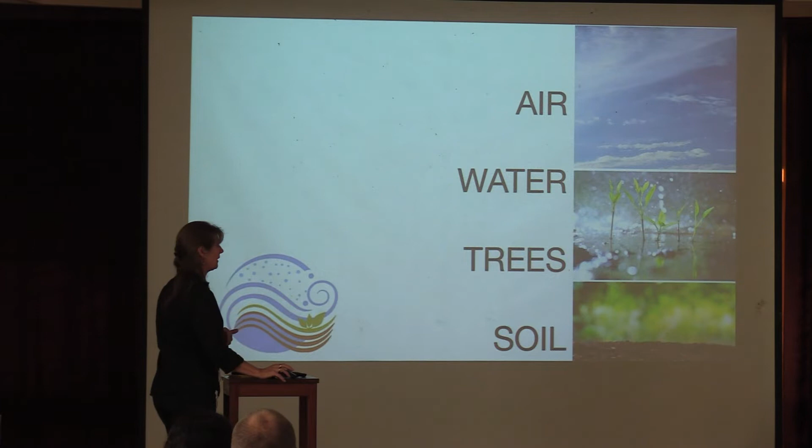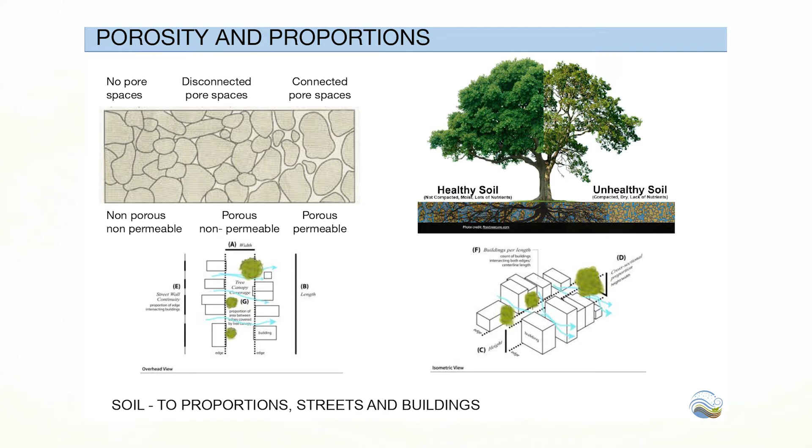The main point where we started was what is important: air, water, trees, the soil. I started out initially with Pavneet, but she dropped out because she got sick and ran out of time. So we started with the terms porosity and proportions, because it was just after the monsoon, and the porosity of the soil, which lets water percolate, felt very important to us. It's very obvious in certain parts of Auroville how it's different.

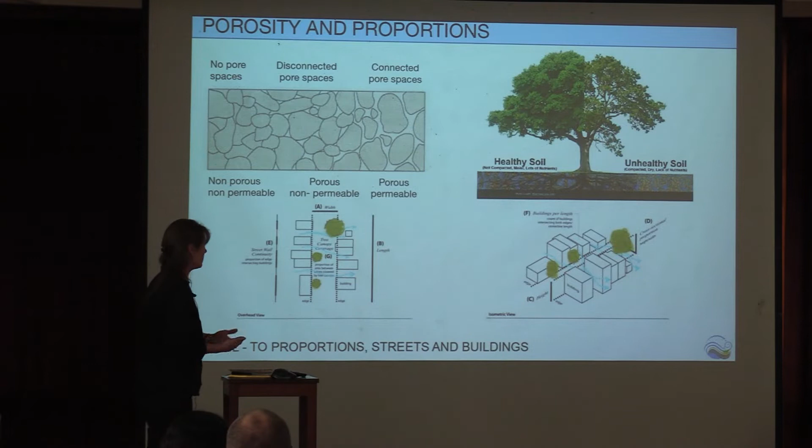Islan had this nice picture of healthy soil, which is permeable, and unhealthy soil, which again relates. So I just stole that image, borrowed it. And exploring this further, it leads to the porosity also of cities, of the streets, of the buildings. I explored all this further, and there's some recap and some not recap.

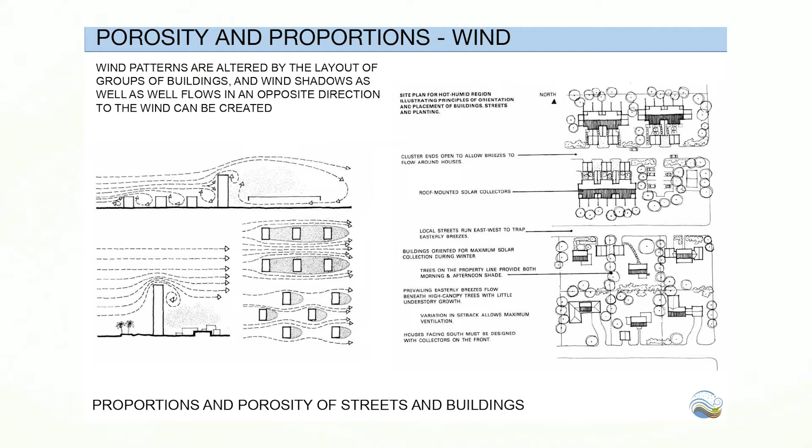Then looking at the wind, how do buildings affect the wind flow? These are just studies, and this one is oriented with an easterly wind, but we actually have more southerly wind, southeast, south. But the principles stay the same: leaving space for the wind, orienting vegetation to shade the buildings, to ensure the wind is able to pass.

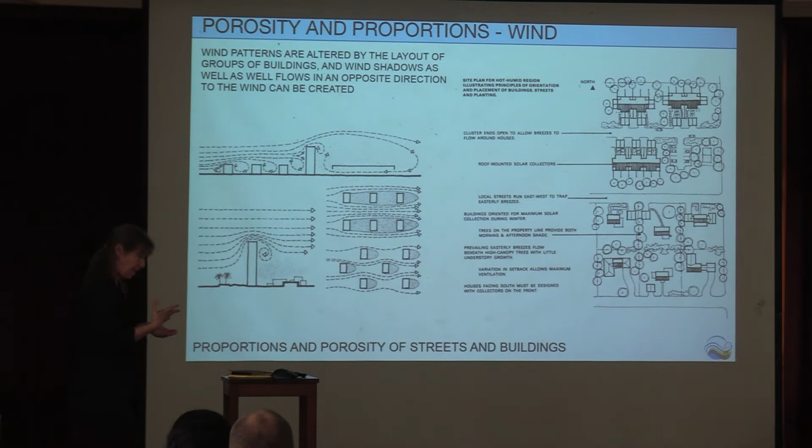We have the advantage that it works very well here because we have the southerly wind, and we want to shade always on the north, west and east side, to allow for the low sun, the trees to shade the buildings from the low sun in the morning and afternoon, because the south and north facades we can shade with overhangs.

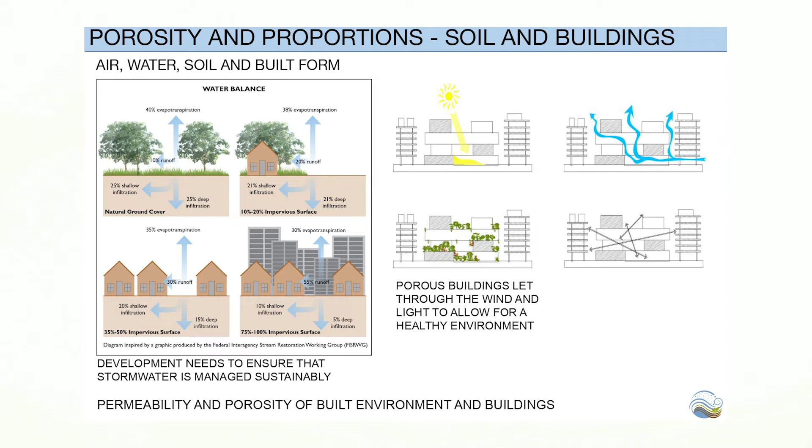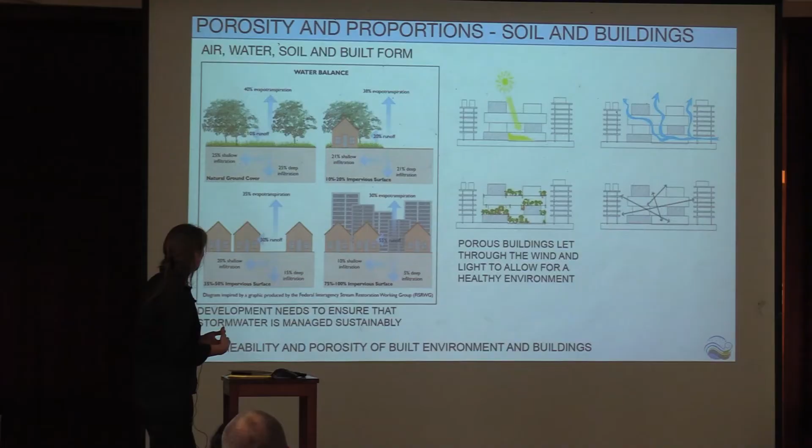So then going back into the porosity and what happens in urban environments: the more build-up there is, the more impervious surfaces, which increases the runoff and reduces the capacity for the ground for water to percolate into the ground.

So it's something we have to take into consideration while we develop the city, that we have this water and the climatic situation of having this very short stretch of the monsoon where we have a lot of water. So we always have to keep that in the forefront of our minds when planning anything, and reduce or minimize the impervious surfaces.

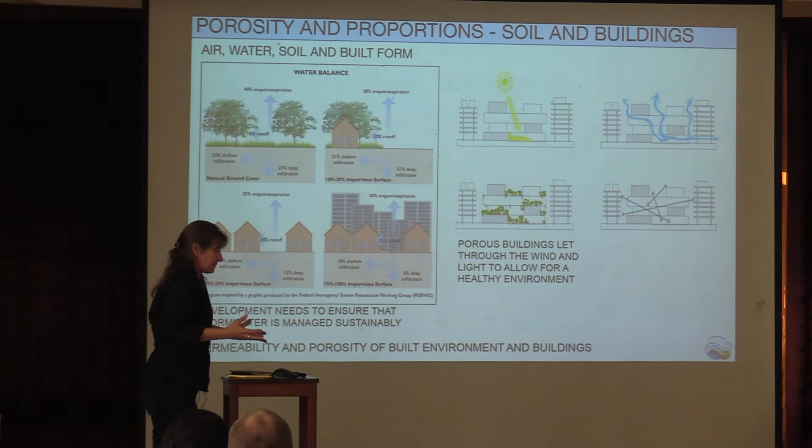That also, the porousness translates to buildings in general. So I tried to take a bigger building and look at just letting in the daylight, making sure the wind can flow through, allowing for vegetation in the buildings - I'll come back to that later - and also being able to look through the buildings so that it reduces the massiveness of things.

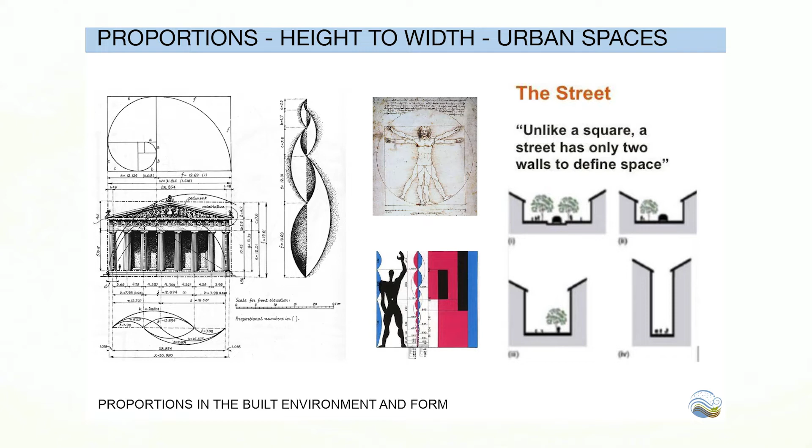So looking at proportions and scales in urban design and buildings in general, this is just an image. It's been done for hundreds and thousands of years - humans have looked at these things and thought about them. It's something we just sometimes have to make sure we take care of.

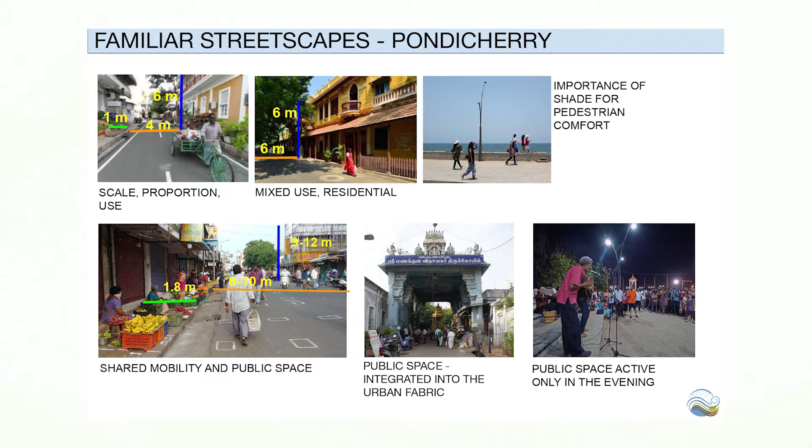So back to the slide I had last time, the familiar streetscapes and proportions of what we know in Pondicherry. Just looking at that and giving it some scale so we can understand the different proportions of residential streets, mixed use, the shared mobility in the narrow street, which is a wide road but lacks shade. Although it is used, everybody's always trying to find that little piece of shade, which is usually used up by vendors. And the beauty of public spaces integrated into the urban fabric is something we really have to look into also here.

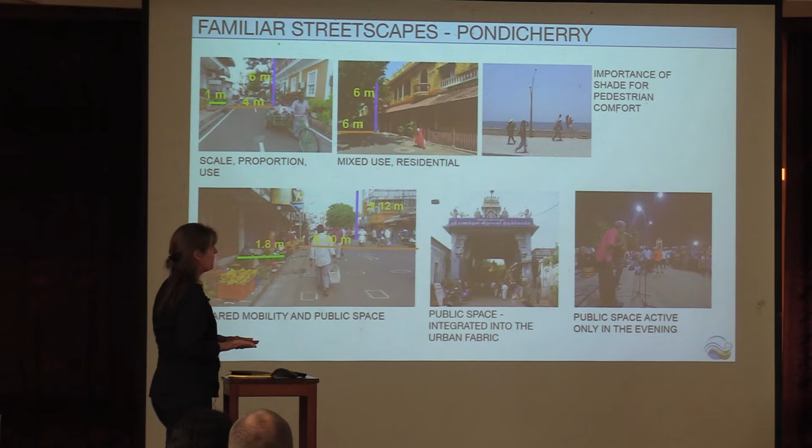And then the problem is if there is no shade, the spaces become very reduced in their capacity to be used. So then they're only used in the evenings.

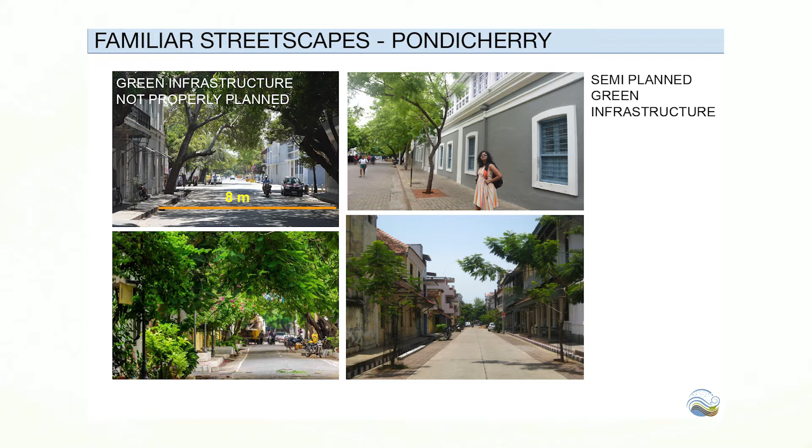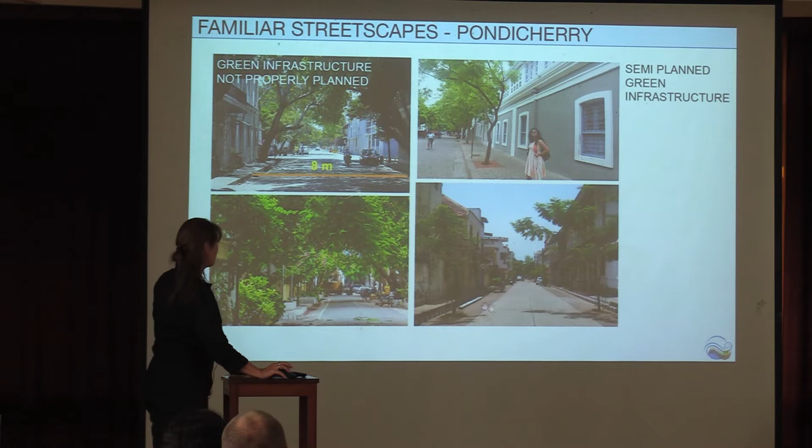And then looking again at Pondicherry's planned and unplanned, or semi-planned, green infrastructure: beautiful trees, but they're not given the space they need, which leads to all kinds of problems in infrastructure, in the buildings, and in the roads. A slightly better option where they've started planning, but you can see that when these trees grow to this side, the situation will not be that much better. This is a slightly better situation.

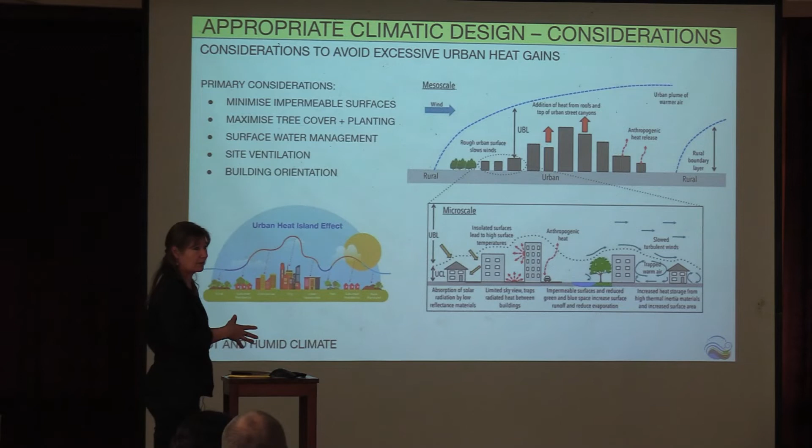Then another problem is, as we develop the city, something Islan mentioned also is the heat island effect - something very important to keep in mind. I guess it comes back to this: the more buildings, the more heat gets absorbed in the buildings, which radiate out, and vegetation can help a lot in reducing that by shading the surfaces of the buildings so they don't heat up.

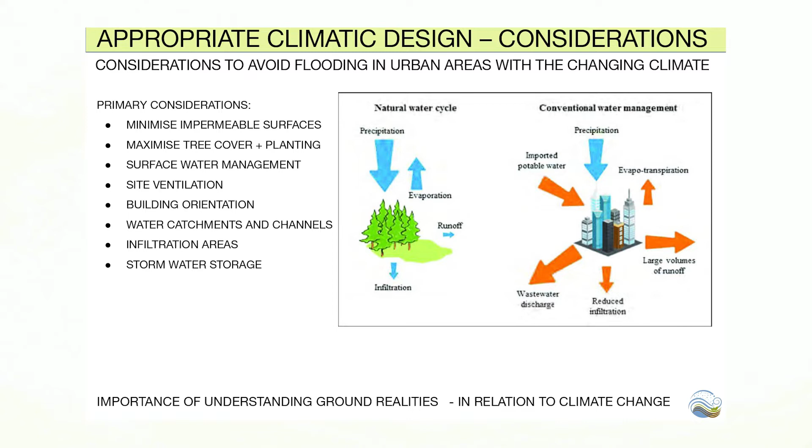Yeah, here again we have just a list of important things to consider, with, again, the runoff, the difference between the two.

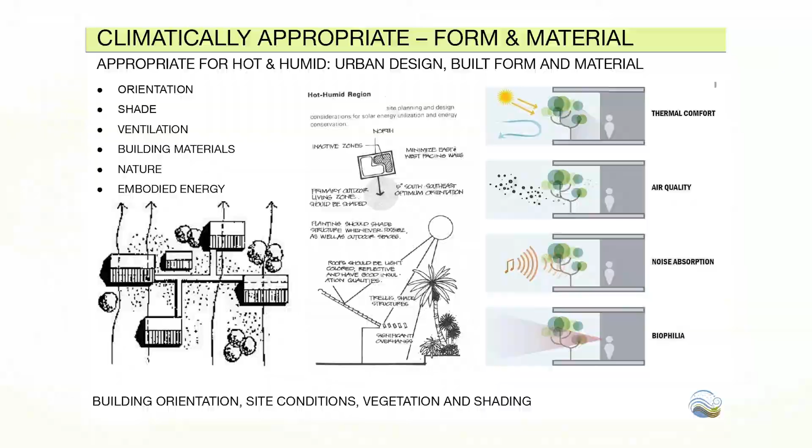Going more specifically into this actual site situation, we're allowing for the wind to pass through the site so that houses have natural ventilation as much as possible, which can avoid air conditioners that again lead to more global warming, and the importance of having vegetation in and around buildings.

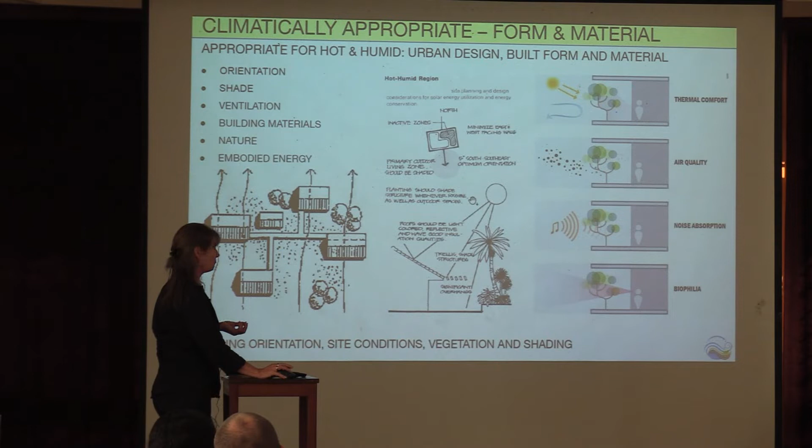It's great for thermal comfort and air quality. It absorbs noise, so if you have trees and plants close to the building, noise from your neighbors gets distorted and absorbed. And of course there's the biophilia effect - humans are better off in green places.

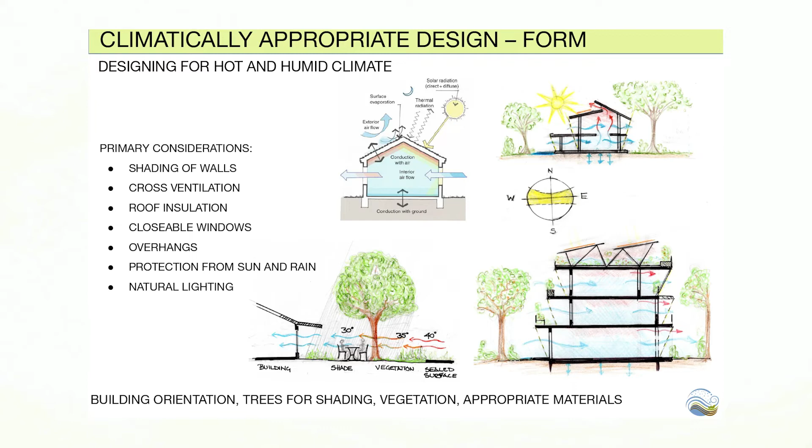Just some simple considerations - what I already mentioned is ensuring the shading of your facades on the south and north, because we are close to the equator, just 12 degrees north, so the sun actually goes to the north from May to August.

So we also need overhangs on the northern side. I figured out that the northeast monsoon comes from the northeast, and no matter how big your overhang is, you're never going to keep the water from coming onto your terrace. So there's no point trying, but at least you shade from the sun, making sure your facades don't get any sun during the day.

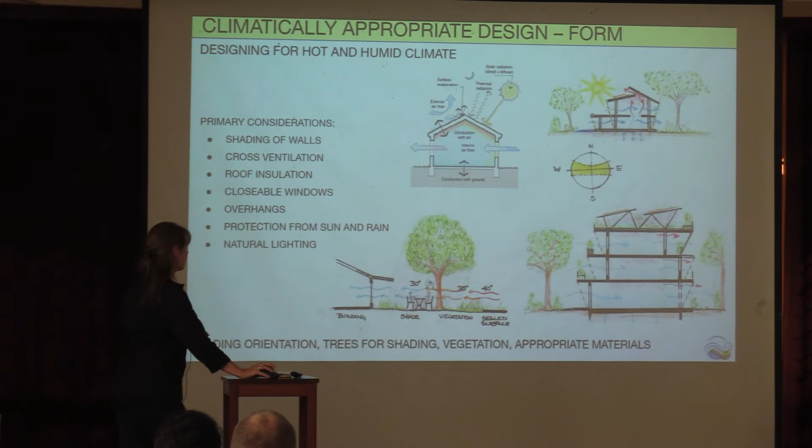The south is more easy because the sun is generally high in summer in the south, and in winter when it's low, you actually want it to come in, so it's nice to have a bit of sun on your terraces sometimes. And again, the importance and advantages of having trees, which reduce the general temperature of the surrounding area.

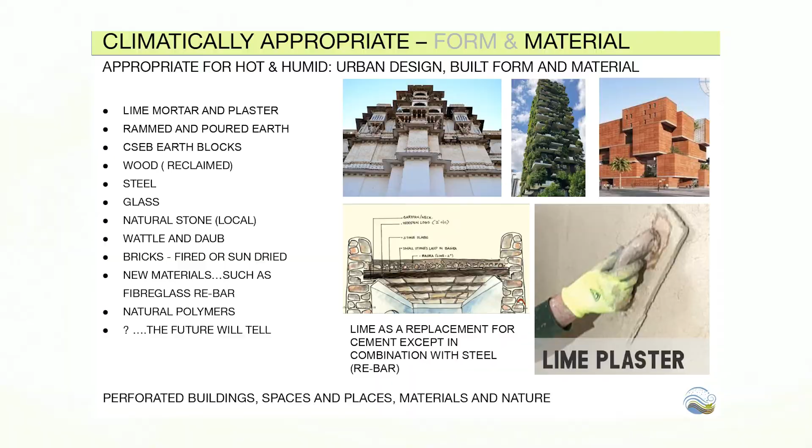Then I wanted to look into building materials, because last time I had mentioned that concrete is not the way forward for everything. Of course we can't avoid it totally, but there's so much available.

We have our homegrown poured earth, rammed earth, and compressed earth blocks. The ancient techniques of lime plaster and building with lime in general - I've tried to explore that a bit. I asked Satprem and he confirmed it doesn't work with steel, so we can't use it as concrete. But looking on the internet, I found that nowadays we have fiberglass reinforcement bars, so that's actually an option. There's also graphite, but I think that's a bit expensive.

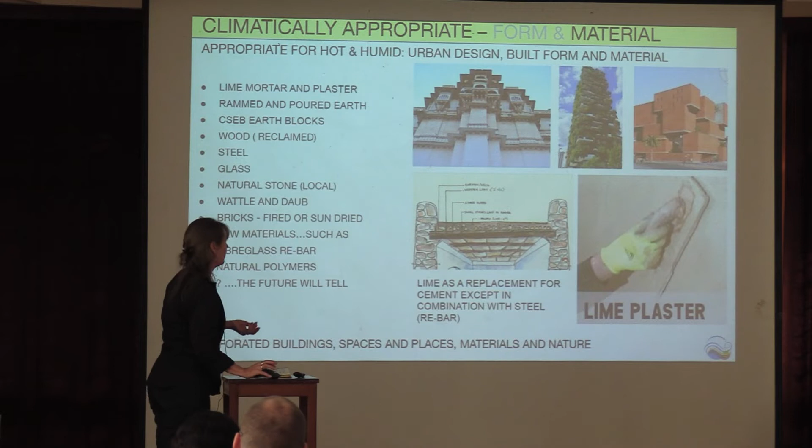But we don't know what the future holds, so we'll see as we go along. I think if we want to be all we claim we want to be, we really have to take these things seriously about reducing our carbon footprints, going down that road of sometimes having more difficult building materials to work with, more maintenance, but in the long run it's actually better.

Lime plaster and lime building works really well. It makes a significant difference in the temperature of the buildings and the general climate. So just looking at some of the homegrown things we have - wattle and daub.

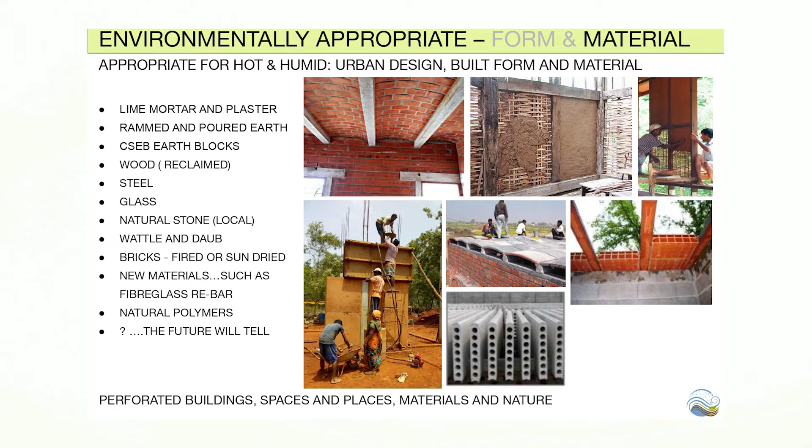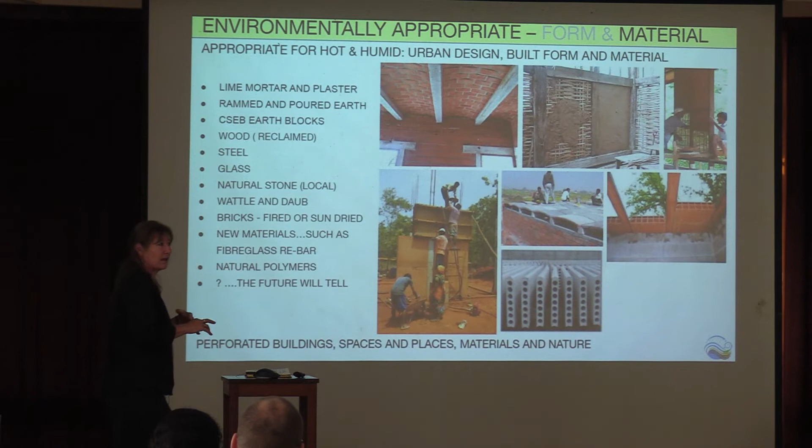And then I discovered that in India nowadays you get pre-tensioned concrete, precast slabs or whatever. So that's again, if you have to use concrete, it's a reduction of material and fast installation - something to look at also.

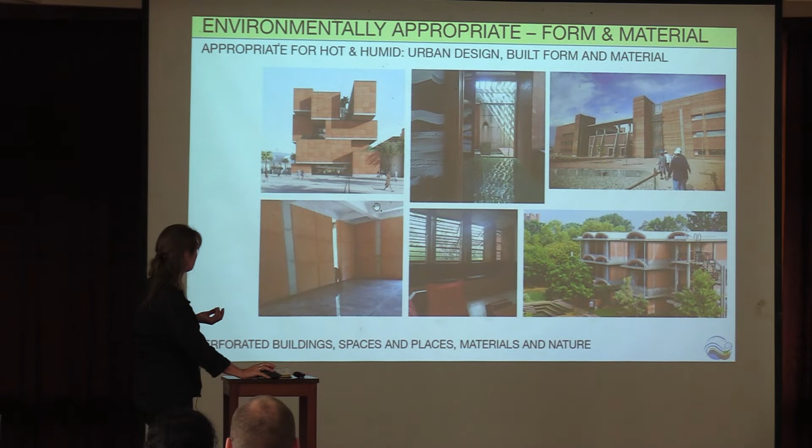This is in Auroville, this is also in Auroville, this one too, and this is somewhere else. But I just wanted to show that large buildings are actually being made with rammed earth and poured earth, so it's not like we only have one or two story buildings. We have to see how that goes further.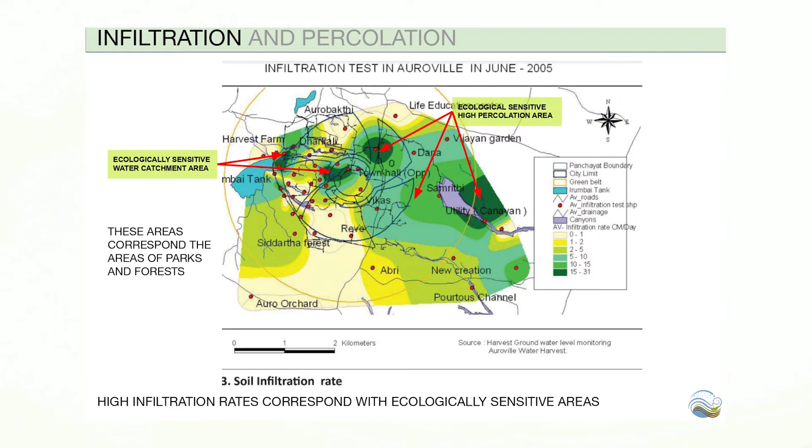I'm sure other people know much more about this, but then I had this infiltration map, which is very old. I looked for a percolation map but couldn't find anything - the two are very much the same. What this shows is that the areas with high percolation or infiltration are also where the forests have developed mostly.

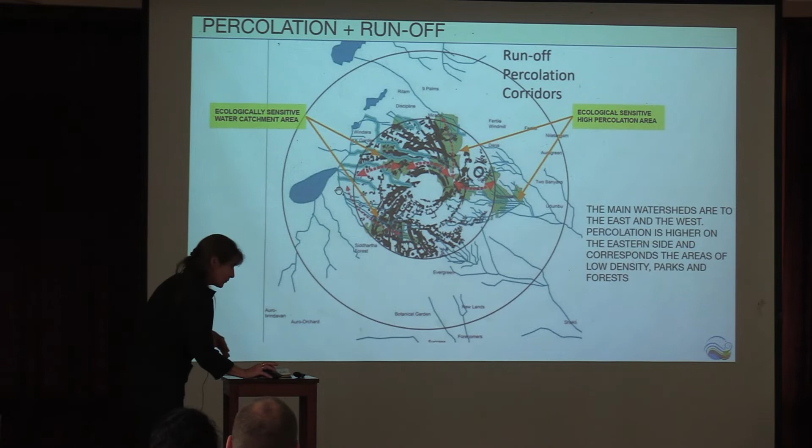This is courtesy of, I think, Isla - a very nice schematic picture of the runoff we have in Auroville. So the ridge, and then it goes to the east and west, and a little bit to the north, and from here the Ore Dam goes also to the northwest. So here is just to show where that is in relation to the forests we have.

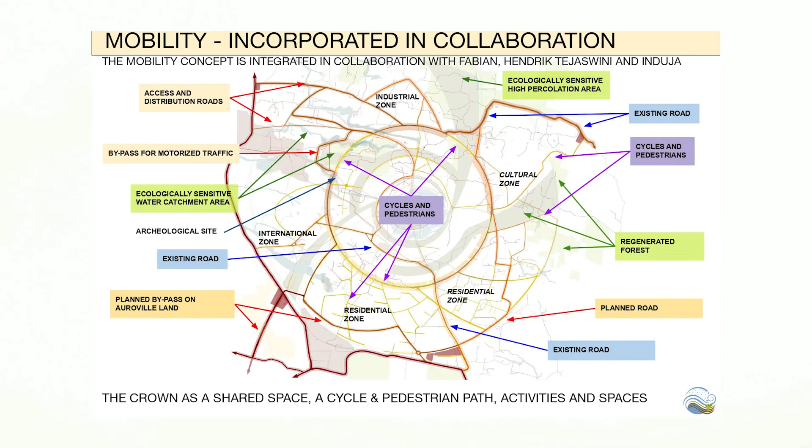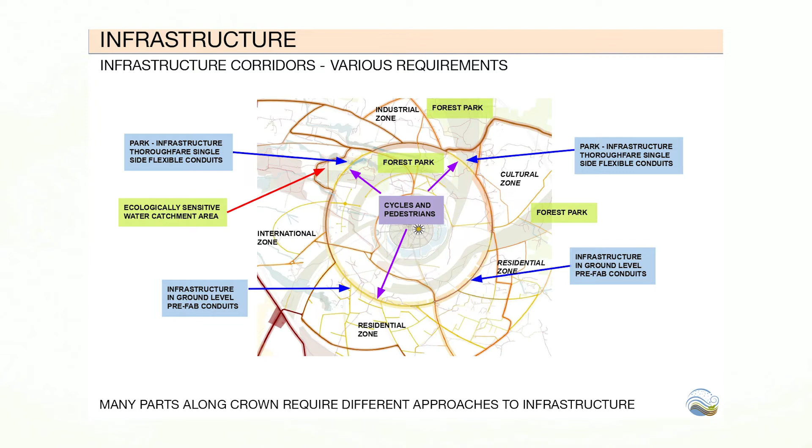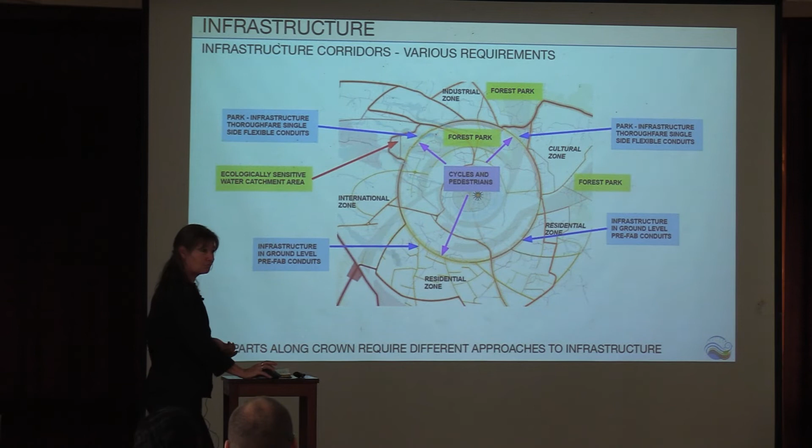And then I jump to mobility, which I did in collaboration with, or mostly just borrowed from Fabian and Hendrik and incorporated - just showing where what is. Basically this has all been discussed, but it leads me to the next topic of infrastructure, saying where there's parks and only pedestrians and cyclists, and for now also less need in most cases of infrastructure.

So I came up with this schematic plan for the infrastructure, with precast conduits in places where we will need more infrastructure in the near future. This includes the residential zone up to Solar Kitchen, and the centerfield stretch where for now there's the high tension cable and the OFC is probably in as well.

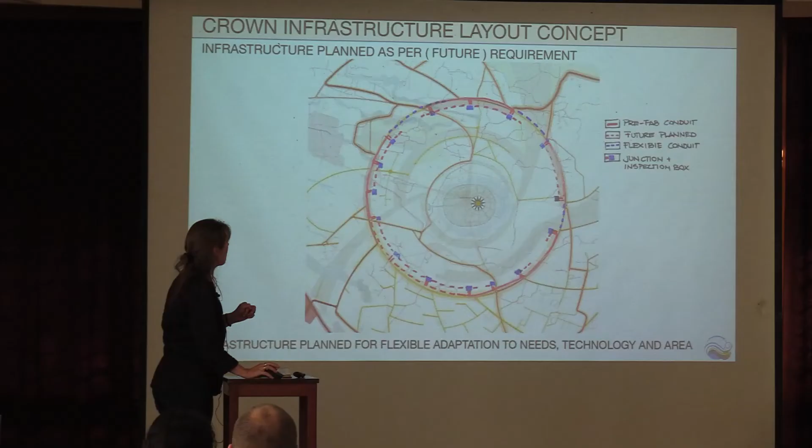We don't actually need to do anything there, but we should definitely plan for a conduit, because it will be the most dense residential area, so we'll need conduits on both sides. Then this is the international zone area - not entirely correct, but anyway, we have a conduit there with the possibility for more. Through Darkali, we just have a flexible pipe which goes in, and all the cables and conduits can go through. I'll show you - and the same goes for the Bliss stretch.

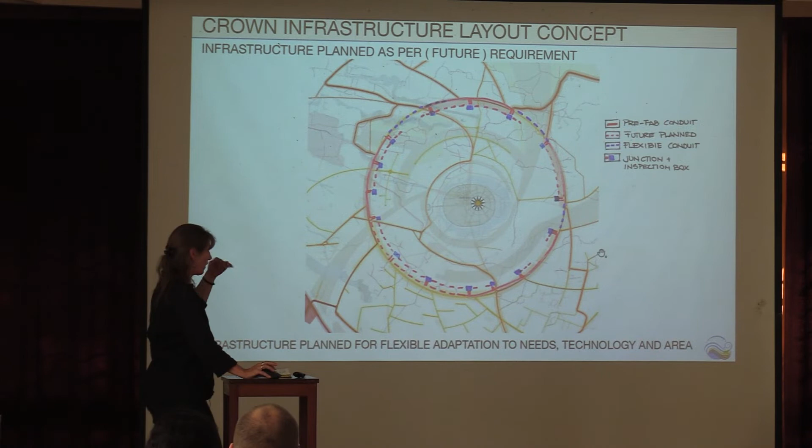Here we already have the high tension cable, but there are no buildings planned here, so nothing needs to be connected - it can just go from junction box to junction box, and from the junction boxes it can pan out. This is just showing it more in context.

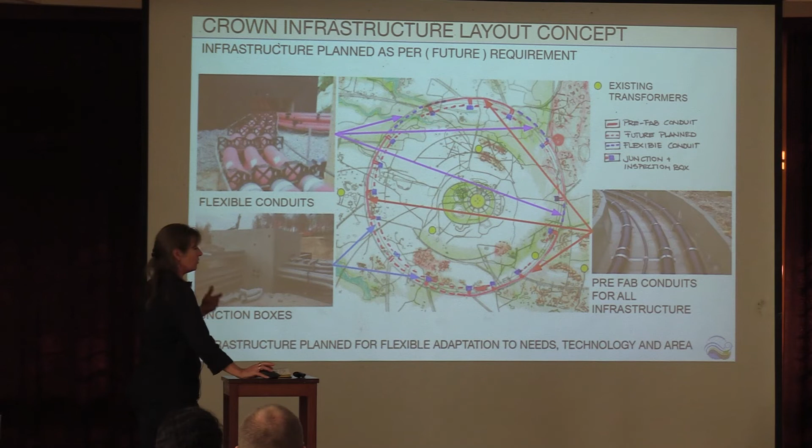And these would be flexible pipes which can go through the parks and forests, and then into the junction boxes, from where they can either go into a conduit or be connected. These are actually examples from the presentation we saw just before lunch from the experts from Ahmedabad.

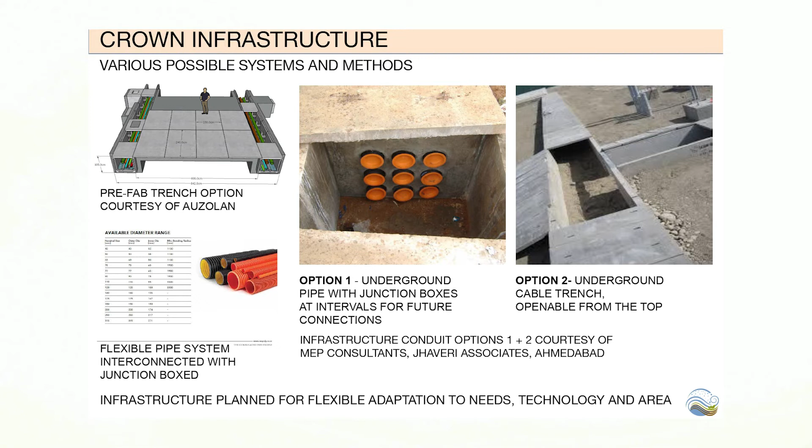And this is Auzolan's Eric's proposal - he made a quick proposal of what would be possible, homegrown, produced here. I think that's actually a really good option.

Like I said before, it's a huge expense now, but everybody has confirmed that in the future and in the long run, it's going to save a lot of money because it will eliminate this perpetual digging up and breaking of pipes and cables, because you'll always be able to just lift up the lids or go into the junction box, connect new things, and fix things. So these are just some options of nice, neat solutions.

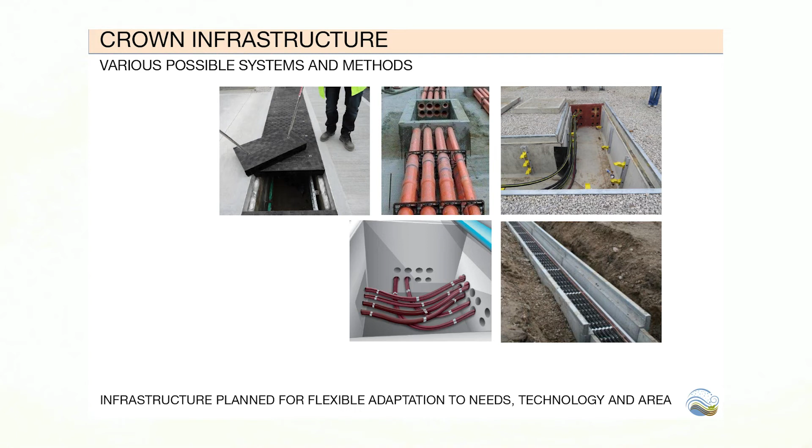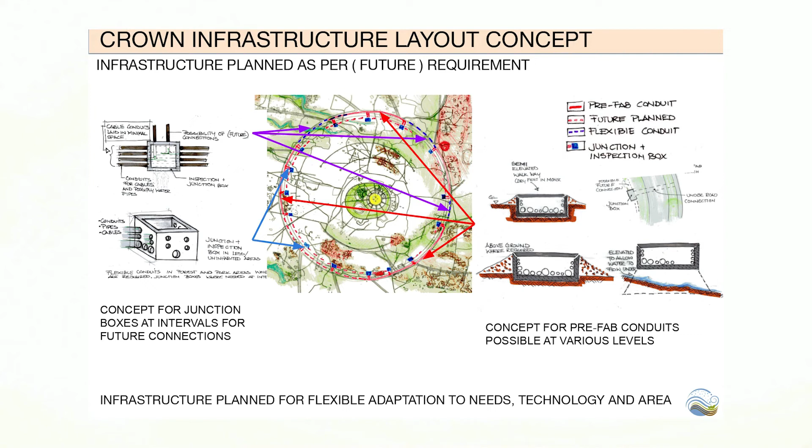And my little sketch of the conduits which could follow the contour of the ground and be used as cycle and pedestrian walkways. They could be above ground where it's necessary for water to flow under, or in the ground where water can flow over - they could be sealed. This is just a very simple sketch of having the conduit always on the same radius on the outer side of the road, with junction boxes.

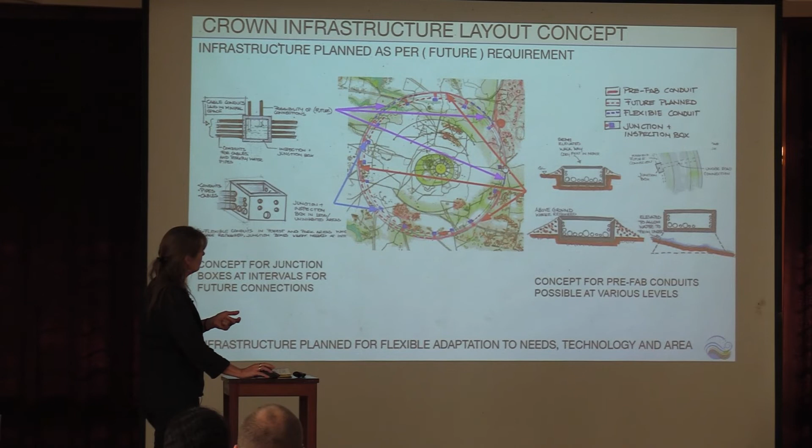It goes under the road, and you have a junction box, and from there again you connect out. So these would be the junction boxes, here it would be a flexible conduit, and on that side it would be a precast conduit.

This is from last time - I haven't done anything further on this. This is the intersection of the international zone with the Darkali forest.

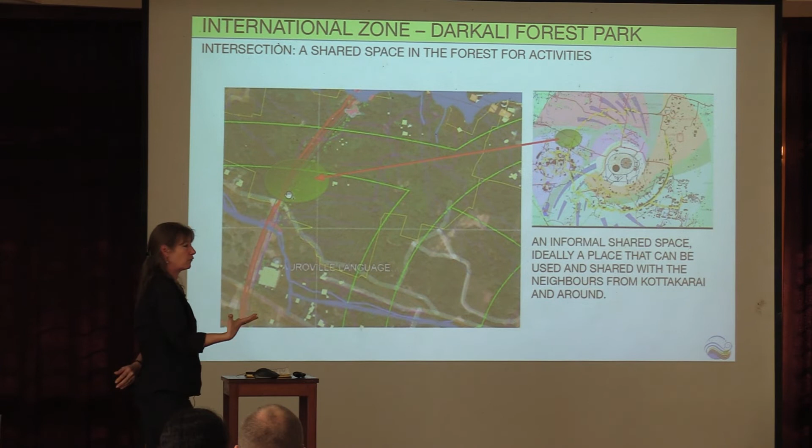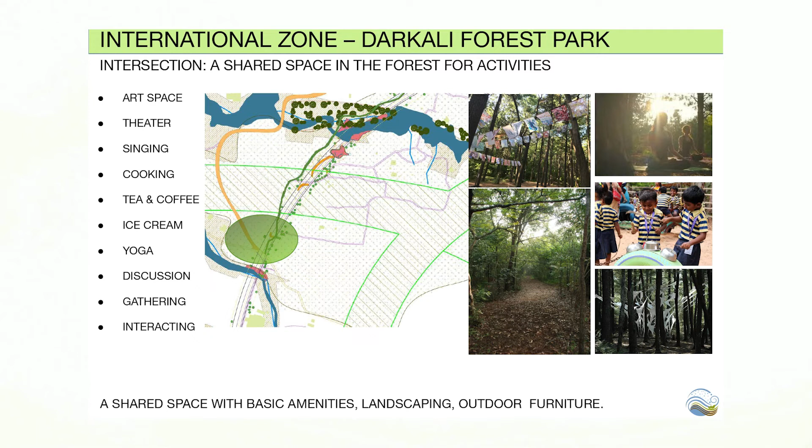I wanted to open up the southern side of the Darkali forest for more activities, because it's such a beautiful place, and it would be nice to share it with more people. Just simple activities happening there - it doesn't have to be anything specific. It could just be yoga, a little get together with kids, art installations - just to make the Darkali Park accessible to more people while still keeping the inner part of it as a very quiet sanctuary type of wild place for the wildlife.

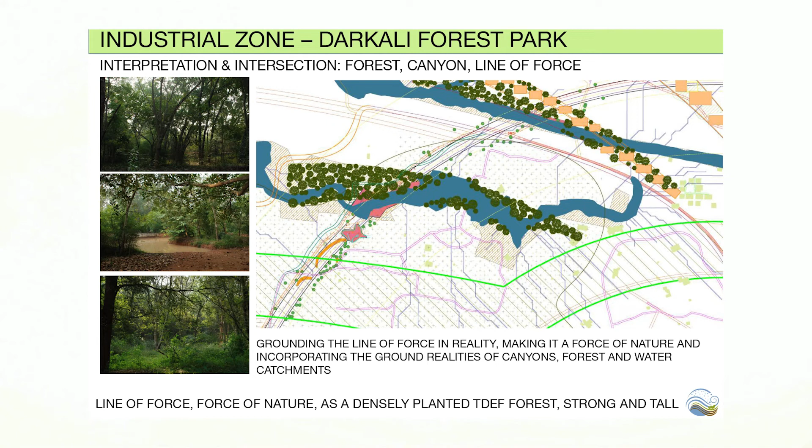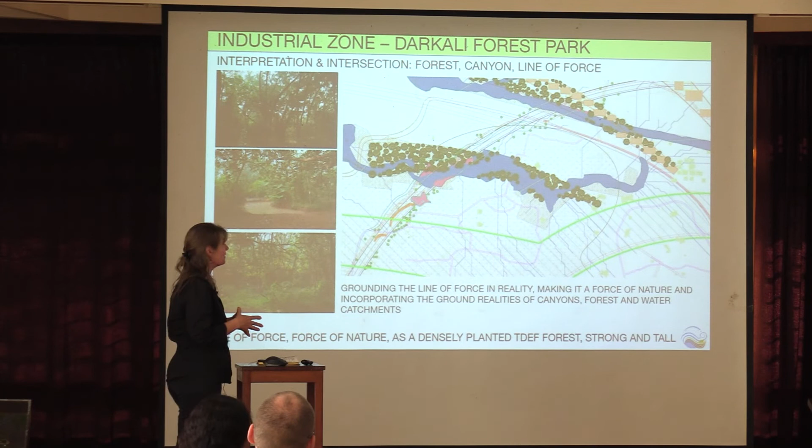And this line of force has been discussed many times, and while I was looking at the lines of force, I realized that it's on the canyon. Last time Neha and Ganesh presented this idea with the water, so that fit in beautifully, and I had this idea to just plant a really dense forest of TDEF so that it has its own power and its own force - it becomes like a force of nature, what Ganesh and Neha was saying.

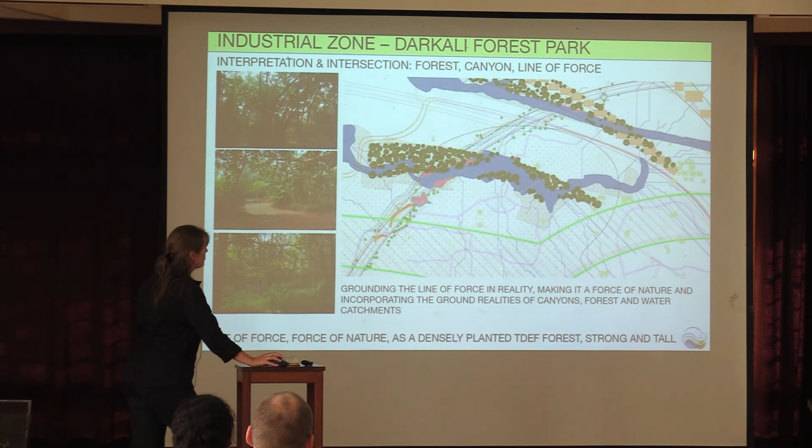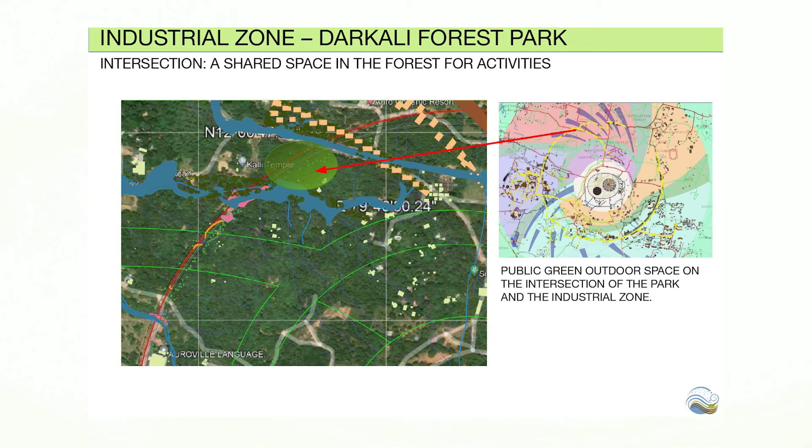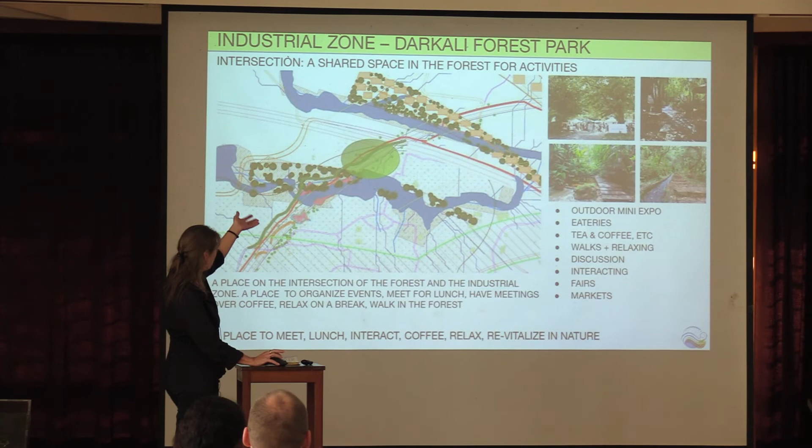And we have this other line of force, which is half on the canyon. So I thought, okay, half of it would be planted, and the other half would be very light structures. Going to the other side, I haven't done further work on it. It's a place on the northern side of Darkali, between the industrial zone and Darkali. It's more a place for little markets, exposing people to present their products, lunch places, eateries.

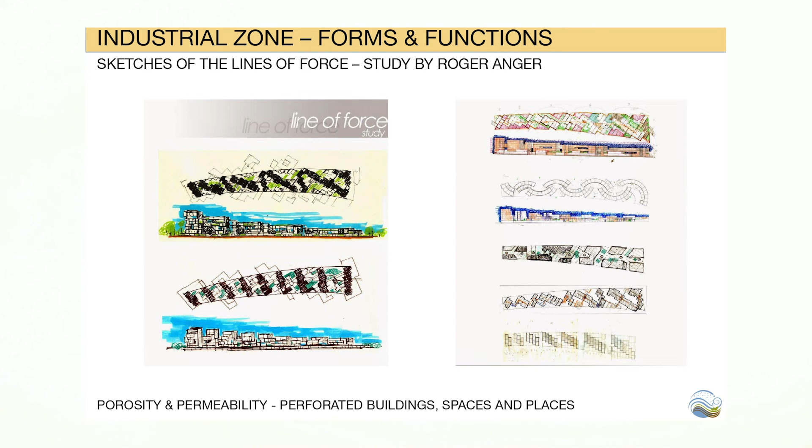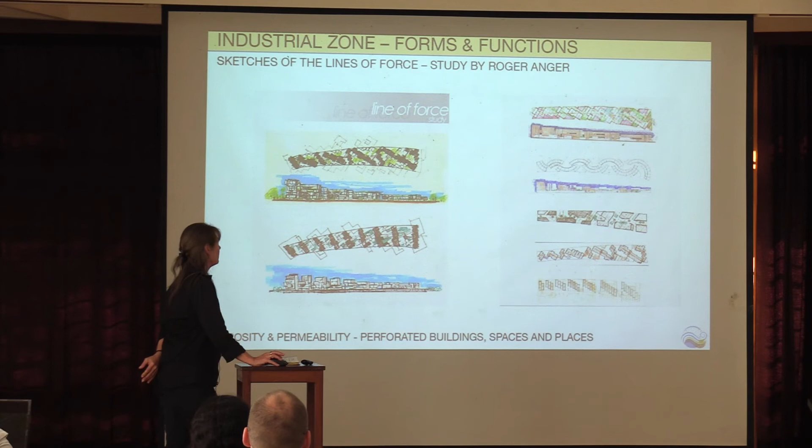People can go there for coffee, lunch break, enjoy the forest in that area, and the water bodies. Then, by chance, I had a brief encounter with the lines of force, but I couldn't come up with anything which did justice to it. But then I found these studies of Roger Anger, which tie into the ideas I have of these open spaces, permeable, porous, and off the ground so that ground coverage is minimum.

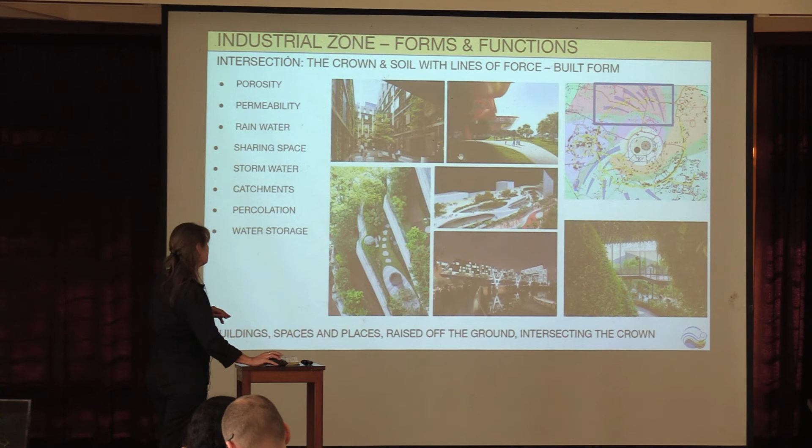So these are a compression of the slides I had last time. It's about the industrial zone, where the soil typology is not so permeable. So it's good to have buildings raised off the ground, allowing more ground for water to percolate rather than having too many closed spaces. And then again, bringing lots of nature in.

Keeping buildings very open with cross-ventilation, wind, shade, nature.

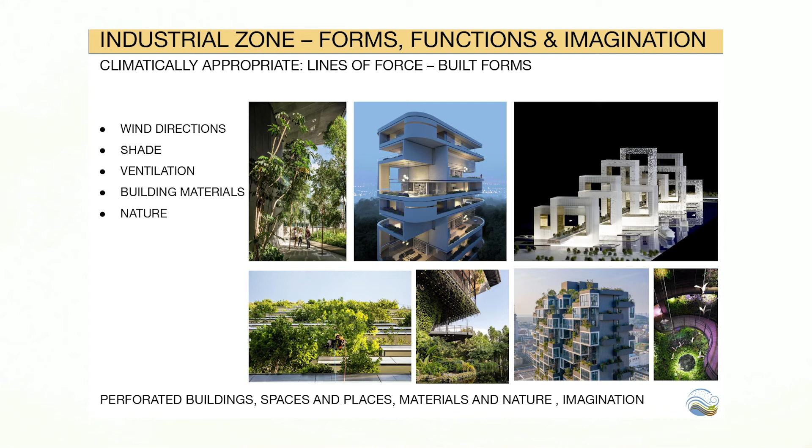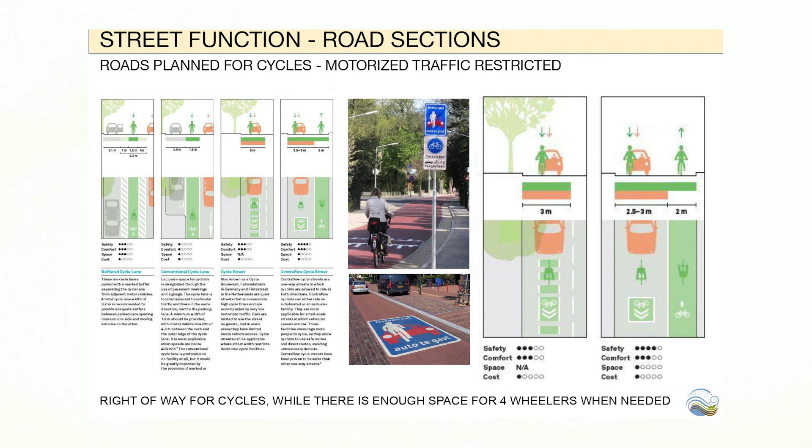Going into street width, looking into that further because there was an interesting comment I got: that the road just needs to be as wide as an emergency vehicle, so 3 meters. This is supposed to be 3 meters, sufficient, and it turns out that it's also the most comfortable and safest if you give priority to cyclists and keep cars as guests on the road.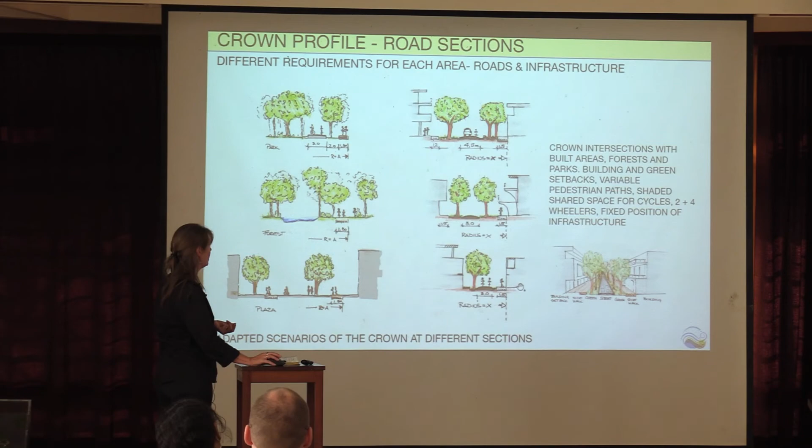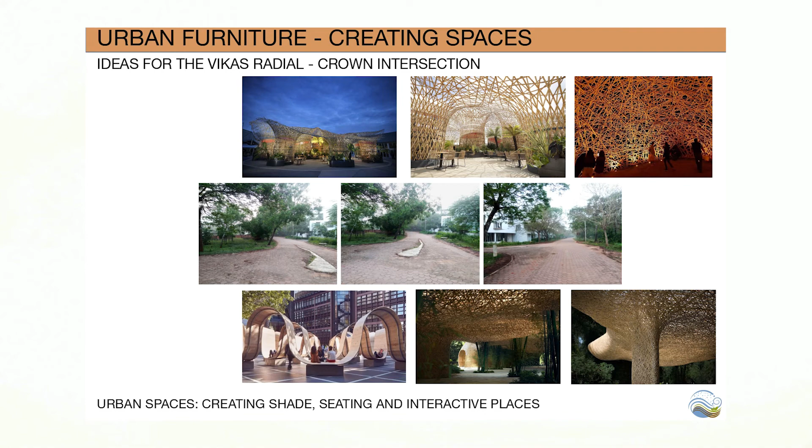I wanted to go into much more detail, but I got as far as looking at this corner of the humanscapes and Kalpana. They're fuzzy because it was foggy in the early morning. The idea is how to, with very simple methods, actually create little public spaces which are at least semi-shaded.

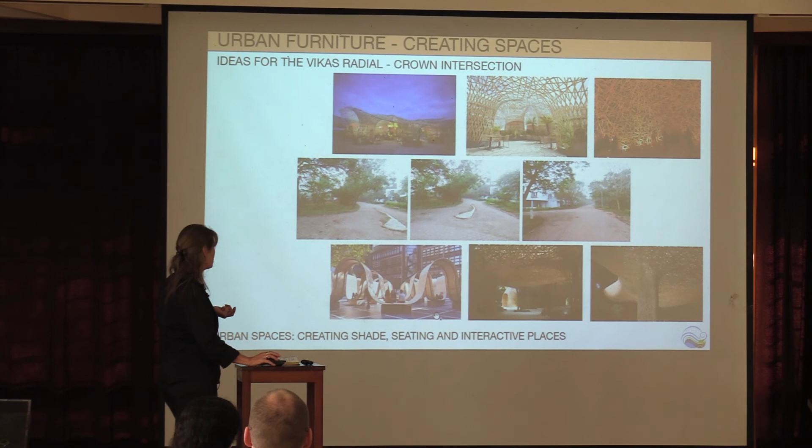So I came across all these fantastic bamboo structures. I thought, okay, that's something which can happen at relatively short notice. It's also creating spaces with no need for any kind of monetary transaction. You can come there, just meet up with friends, sit and relax.

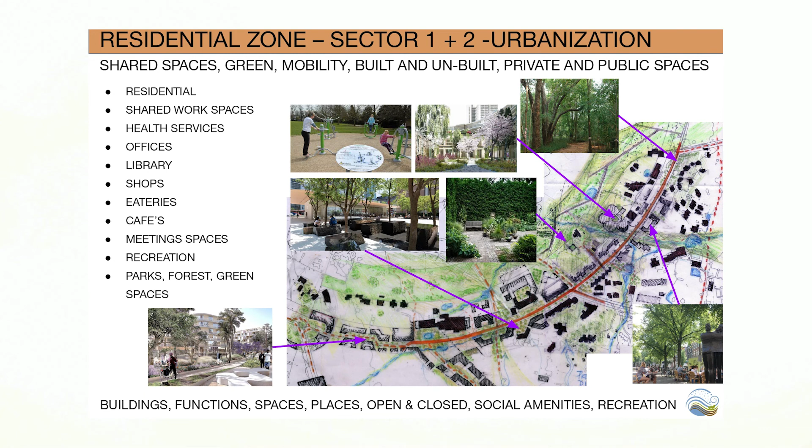This, again, is just a compression of what I had last time - the different aspects of what could happen on this stretch of Crown, which I wanted to look at in more detail. Different areas, I don't think I need to go into that much more. Again, just informal seating areas, some areas where people can exercise in the park maybe.

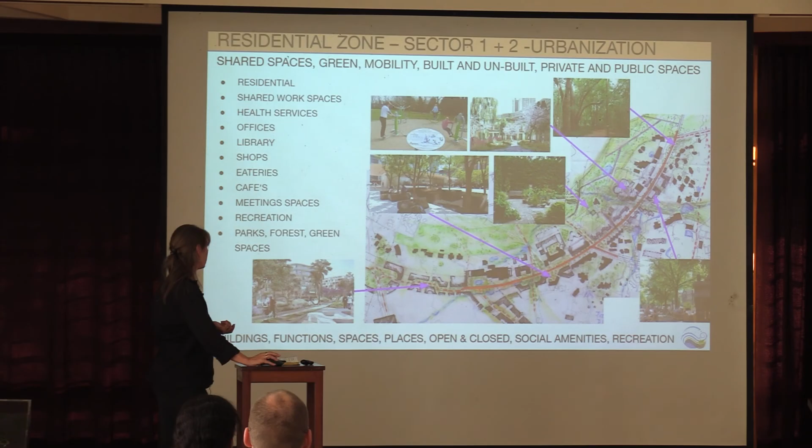Moving on from the solar kitchen, having that stretch in center field between the center guest house and solar kitchen could become like a pedestrian-cyclist area with lots of green. Then I wanted to look at the solar kitchen again, so I went into a bit more detail.

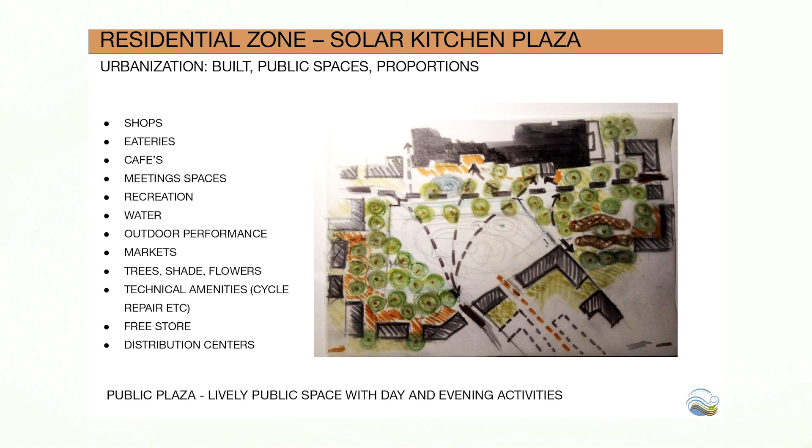The idea was, this is the edge of the line of force. So I just looked at what the movements would be. This is the solar kitchen PTDC - where do people come from, where do they go? And then create shade with trees and temporary shading structures until the trees are big.

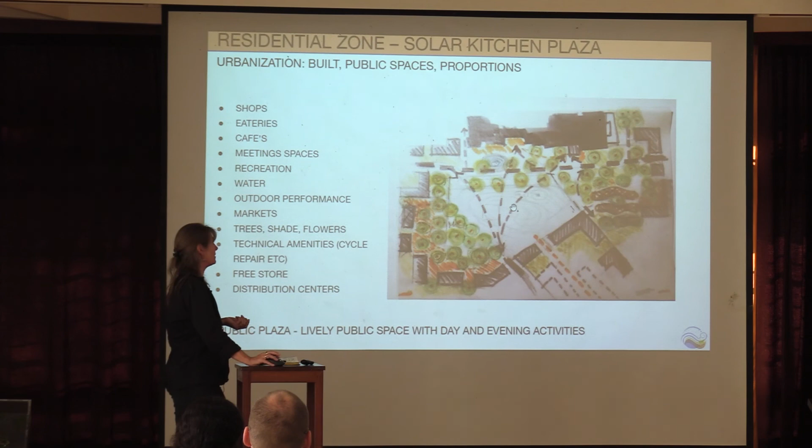Along the edges, we could have eateries and whatever, and then keep the center as an open space, which could be like a sort of step well for activities. So just some impressions.

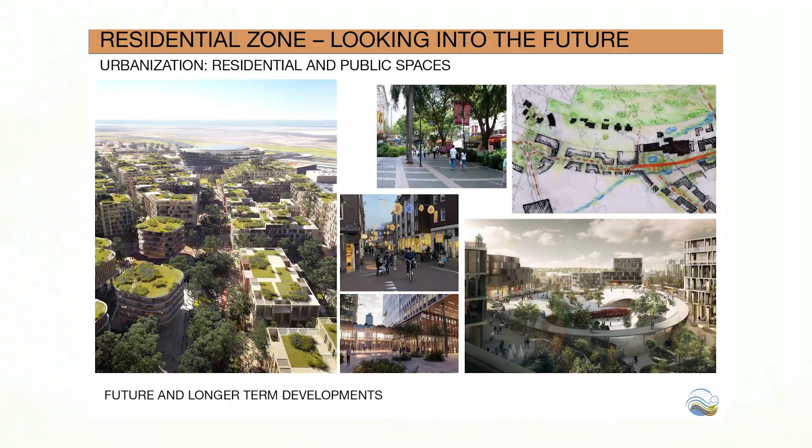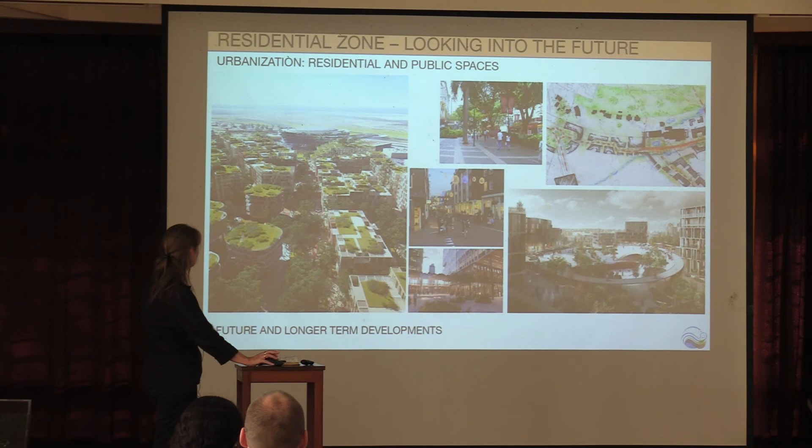Looking into the future, I found this image and I really liked it. But then I got into a problem at home because they said, oh, but we need solar panels on all the roofs, so we'll have to figure that one out. But I just thought if we could do something like that, I think that would be quite nice.

I just wanted to emphasize: maximize the minimum, and plan to allow for the future to be planned, but build only for now. We don't know what wonders the future holds. Thank you.